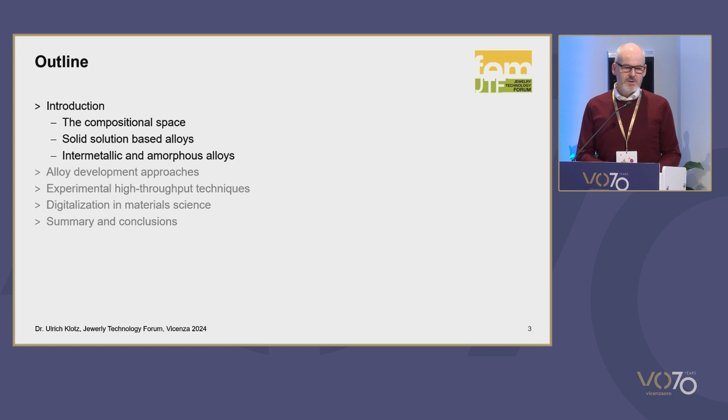I'm going to give an introduction first and then talk about the typical alloy development approaches that are around. Why is alloy development necessary? I will show you some experimental techniques and some simulation-based techniques that can be used for alloy development. And finally, I will go into a point about digitalization in material science, which is a current trend to treat data from different experiments.

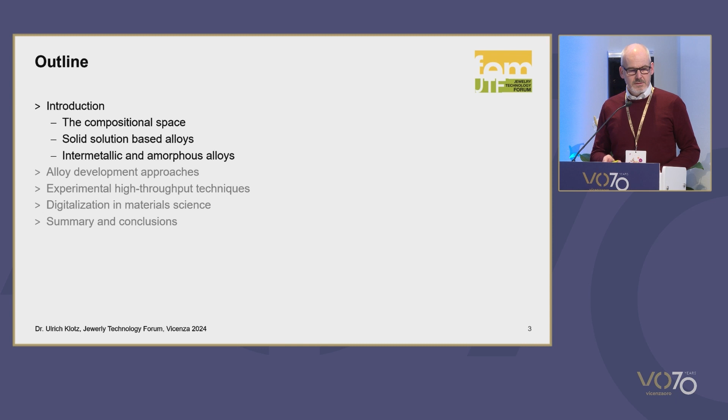So this is a huge space, and we don't know this space. So we only know the regions around one corner, let's say the gold-rich corner, the silver-rich corner, the copper-rich corner, the palladium-rich corner, but you're aware that a gold alloy is very different from a copper alloy and from a palladium alloy. So actually we know very little about the space in between. And so it's actually a no man's land that needs to be explored.

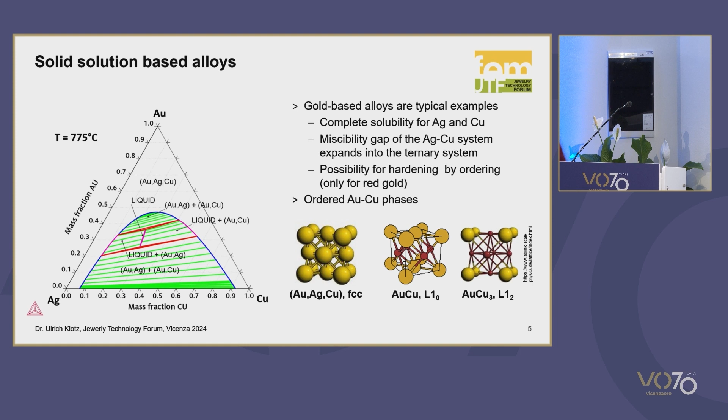So let's first start with what we know. We know alloys like these, gold, silver, and copper. We have 75% gold or 58.5% gold for 18 and 14 karat. And we know how the atoms arrange. So we have solid solution-based alloys, and then we have so-called ordering. This means the alloying elements are taking special places, and this gives the hardness in red gold.

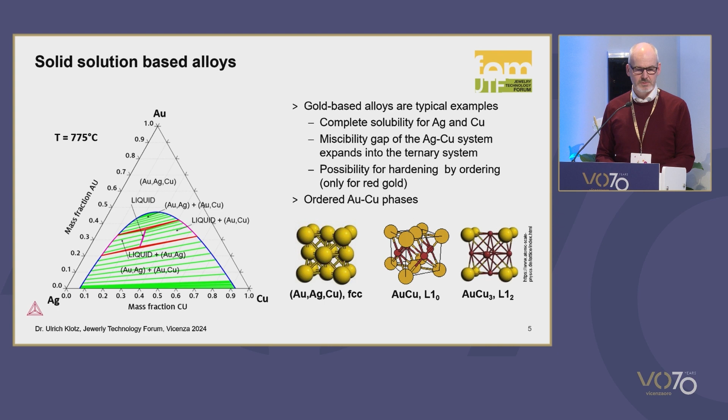Now there are other alloys, like these alloys with the pretty colors. They're based on so-called intermetallic phases. They only form at a very special composition where the atoms take a special arrangement. And we know blue gold and purple gold. And we also know these alloys for many technical applications.

Titanium aluminides are used in jet engines. Nickel aluminides are also used for high-temperature superalloys, also in jet engines or turbines. We know nitinol, shape memory alloys, that is used in the medical area and for technical purposes. So we also know some intermetallic precious metal-based alloys. And so there is a wide space that is not yet fully explored for alloys that might be used for jewelry applications.

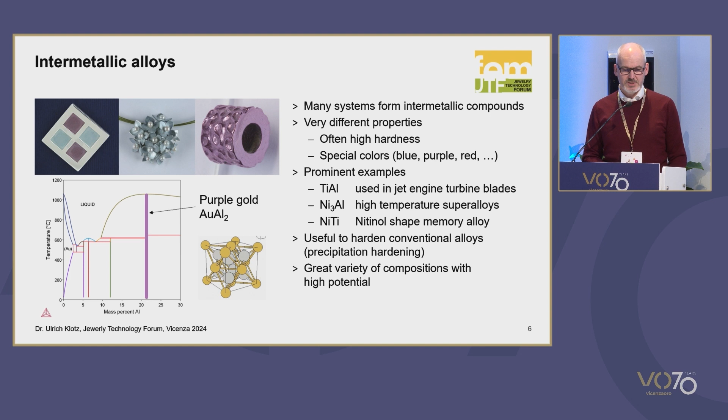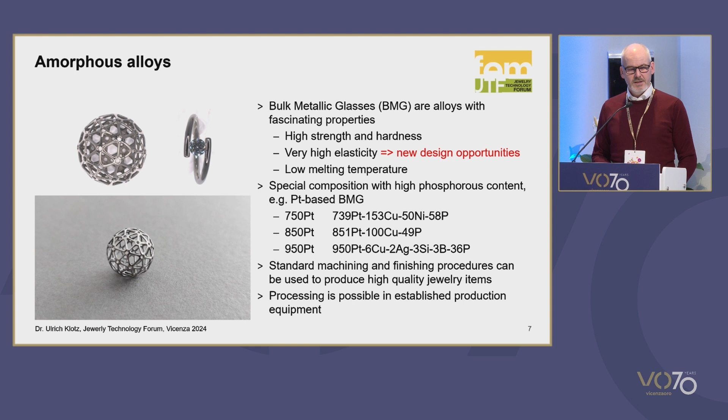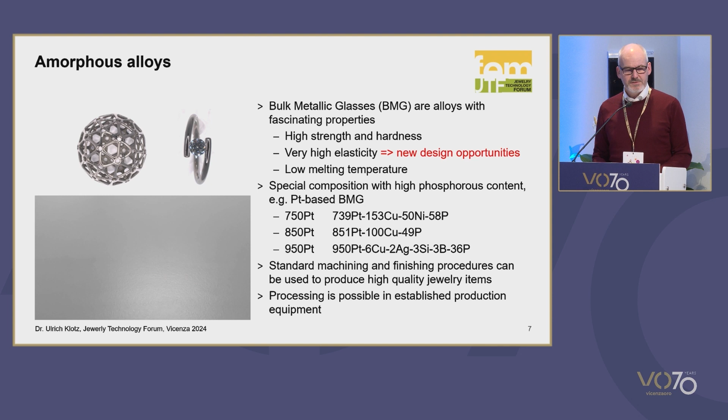Then here is a little movie, the lower image. Maybe you can play this, please. So this is something I presented last year. This is a bulk metallic glass, a platinum-based alloy, which has extremely high elasticity. So you're seeing my colleague Lisa, she's dropping this ball and it bounces back like a rubber ball. And that's because of the very high elasticity of these alloys, and that is very different from conventional alloys.

So these alloys form at very special and specific compositions, and therefore it's also important to find out these compositions. And just by melting alloy after alloy, this is very time-consuming and also money-consuming, so we need screening techniques to find such compositions.

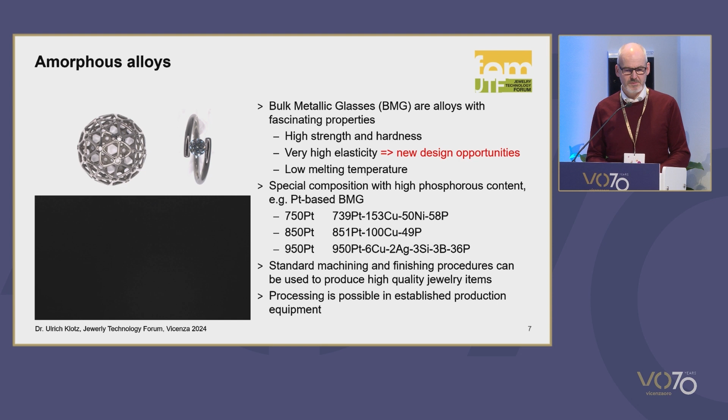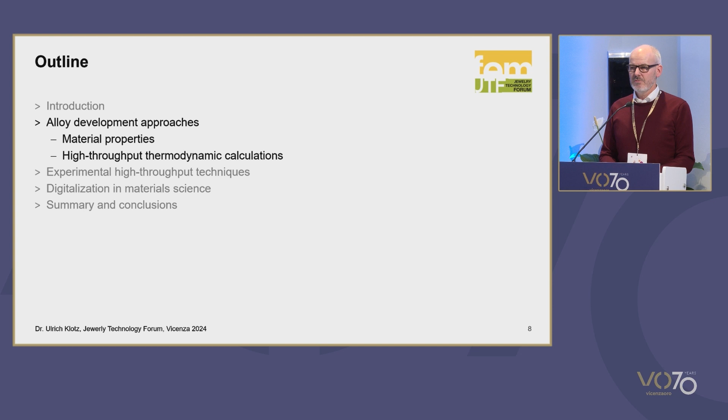Now, let's look at where simulation can help us in alloy development. So first of all, for the material properties, to determine them, simulation techniques are very helpful. And also for high throughput calculations to screen whole composition ranges, wide ranges, with many thousands of alloys. I will show some examples for this.

So first of all, why do we want to do alloy development? We want to improve the properties like hardness, scratch resistance. We know many years ago, nickel was replaced by nickel-free white gold alloys. We know about tarnish-resistant silver alloys or red gold alloys with high color stability. And in general, we want to improve the whiteness of the white gold, the hardness of the alloys. So there are many features that we want to improve with the alloys.

And we also have new manufacturing techniques like additive manufacturing. So the alloys that we know might probably not fit perfectly to that process because they were developed for casting, they were developed for cast and wrought alloys, so not necessarily they are fitting also to additive manufacturing. And we want to have exclusive components like special colors.

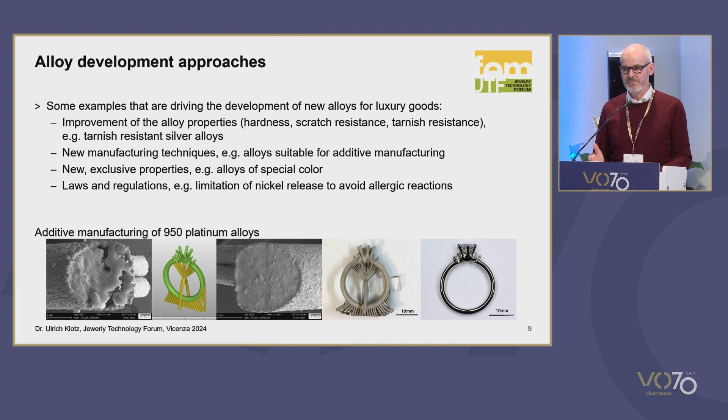And finally, there are laws or regulations that prohibit special elements, or we have elements that are mined with unfair conditions, and we want to exclude these elements from our processes. So these are all reasons why we want to do alloy development.

And if we want to develop alloys, we have to know their properties. There are many properties that the material can have. We have to know this for the production, like our processes to produce them, but also our process to make sheet, to make wire, and so on. And we also need it as input parameters for simulation.

And what parameters are around? We all know the mechanical parameters. They are quite easy to determine: tensile stress, elongation, hardness, reduction of area, and so on. Thermal properties, we are also aware: solidus, liquidus temperature, thermal expansion coefficient, and also those properties are not so complex to determine.

But for the simulation tools, we need properties we are maybe not aware of, physical properties: the volume as a function of temperature in the solid and the liquid state, the density, the thermal conductivity, the thermal diffusivity, the viscosity, and also some chemical properties like Gibbs free energies, enthalpy, heat capacity. And these properties are much more difficult to determine with standard laboratory techniques, but simulation techniques can help us to find them if we have good databases.

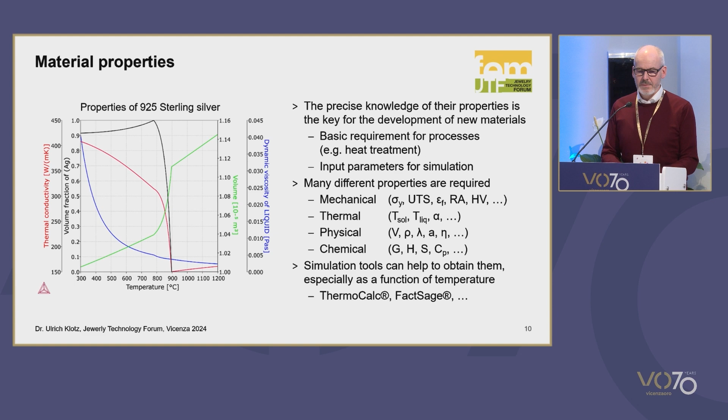The volume is reduced. This is causing the shrinkage problems that we all know during casting. And we see the thermal conductivity increases. This is an important feature for the heat distribution during a casting process, for instance. And we can use these simulation tools to feed our simulation software, like for the casting simulation, for instance, with such parameters. And this is a very important input.

Now we can also do the calculation of the solidus and the liquidus range, for instance. And this is an example I prepared for nickel-based alloys. These were alloys with up to 8 components based on nickel. And we wanted to vary the alloy compositions to find alloys with a suitable melting range, with a certain amount of phases.

And so I used the high throughput calculation technique and calculated 20,000 alloy compositions. And this plot is showing the results. So you see that the solidus, the liquidus temperature, and the melting range are varying in a quite wide range.

And with a set of filters, we narrowed down these 20,000 alloys to about 10 alloys that we found interesting for further characterization. And then we melted these 10 alloys, but we screened a much wider range, and this gives us a much better feeling how the system behaves and what is the role of the different alloying elements.

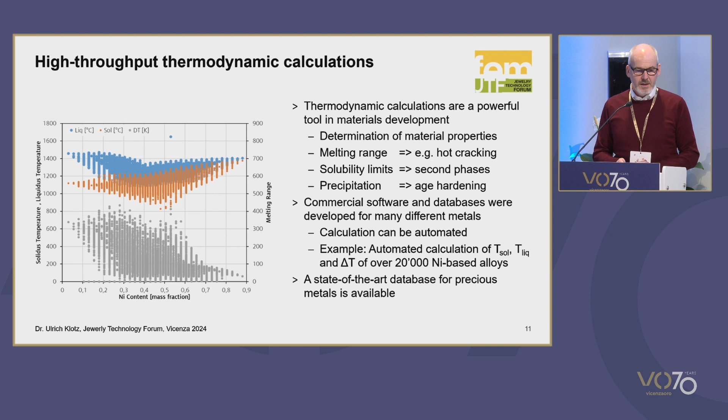Now, often simulation is not working as good as we would like to because we are lacking experimental data, because every simulation tool is usually based on experiments. So when we want to make experiments, it's good to also use screening methods, because doing one alloy after the other is a lot of time and a lot of money.

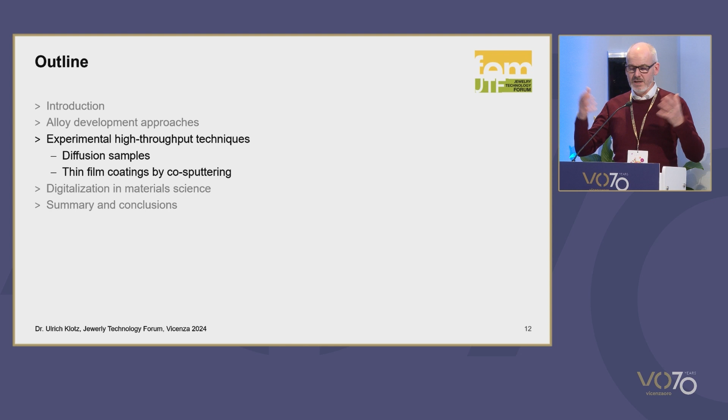But screening techniques are based on samples that show inside the sample there's a certain composition range. And within one sample, we can characterize many alloys without making 20, 50, hundreds of samples. And there are two techniques that I would like to show that are used. One is so-called diffusion couples.

So in this diffusion zone, which is maybe 1 millimeter wide, we get a mixture of all the 3 alloys in this case at the contact point, and we get hundreds of compositions within a very small range. Now we have to measure these compositions, and we can do this in the electron microscope and by microhardness measurement. And this is what we've done here.

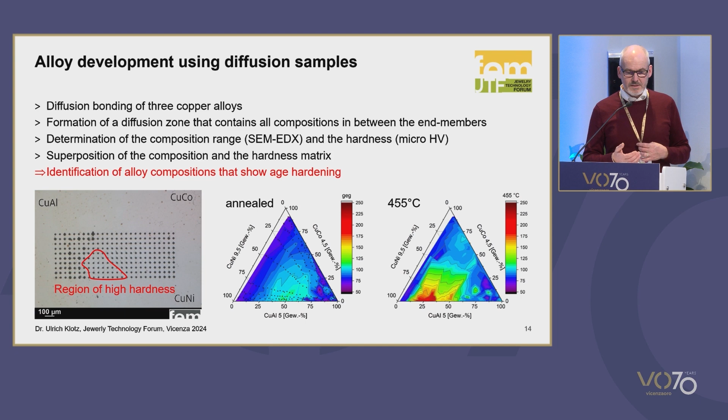And we see that there are compositions that show high hardness, while others still are staying soft. So with this method, we can screen a whole composition range and find alloys that have the potential for age-hardening. With all these samples that are shown here, we have thousands of compositions that we can screen with a few samples.

I can also match the composition with the color after a corrosion test. I can do scratch testing. I can measure the electric conductivity. So there is much more than just looking for hardness.

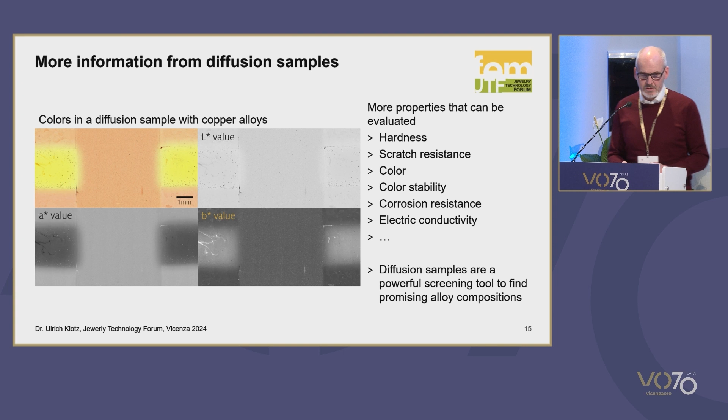With such screening methods, we have a powerful technique to experimentally screen whole alloying systems. Another technique, this is a very old example I found from Jörg Fischer-Bühner's work. There is a diagram missing here. This was obtained by sputtering technique.

So the picture here is showing a glass plate, maybe like 20 times 20 centimeter. And then we used sputtering technique to deposit alloying elements on this glass plate. And we used 3 different alloying elements: aluminium, indium, and gold. So they are arranged in a triangle, and they're sputtering material from different sides. So we get mixtures of alloying elements on this glass plate.

And now we can anneal this glass plate, and we find the blue and the purple color forming. So the lower image is in the annealed condition. And this also helps us to screen interesting composition ranges. And now we can use different mixtures of sputtering targets to determine the resulting color. But of course, we can also measure other properties like the hardness, electric conductivity, and so on, quite similar to the diffusion couple.

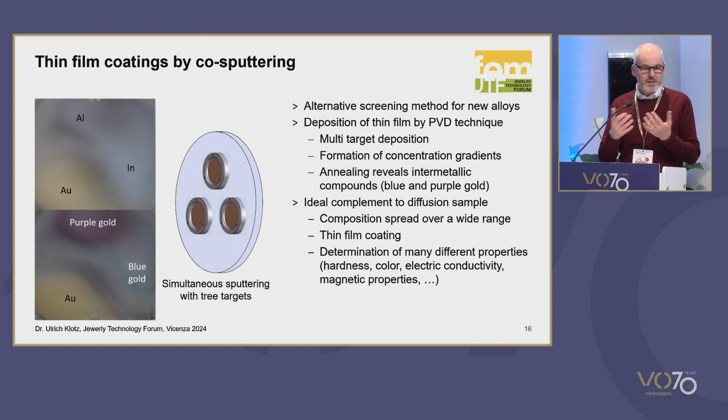But there's a difference between these two methods. With the sputtering technique, we map the area over a wide range, which makes it easy to characterize the properties. With the diffusion couple, everything is in a very narrow range, so we have to have very specific measurement techniques. So that's a benefit of the thin film coating. On the other hand, the thin films are just thin films, so they might behave different than a bulk material. And so with the diffusion samples, we are much closer to the bulk material. So ideally, we can use a combination of these two different techniques.

Okay. Now, to finalize, the digitalization in material science is a trend at the moment. And you probably have heard about a digital twin or about ontologies. And so what does this mean? We have data from many different processes, from the casting processes, from computer tomography, tensile tests, from metallographic images, hardness measurements, and so on. And also from simulation techniques.

Now, all these different results are related, but the data are generated in different systems. And they are located on different computers, maybe on different network drives, and maybe you don't know where all these data are. And after half a year, you don't know maybe how you measured them. So you not only need the data, but you also need the metadata, the information about how your data were generated. And you have to link all this information. Now you can make big Excel sheets, and after 3 months, you forgot how you arranged the Excel sheet.

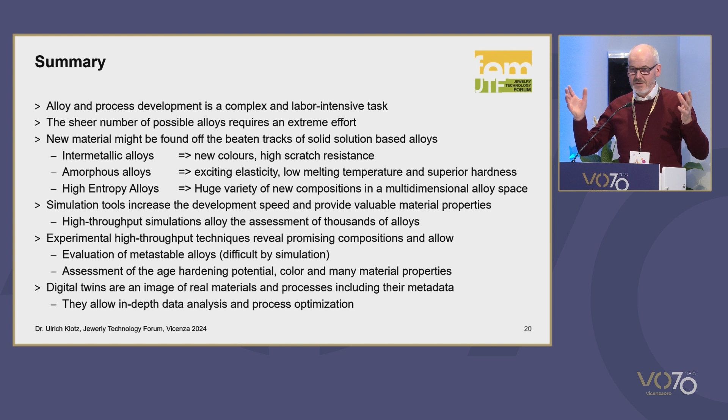So with this, I would like to summarize. I showed you that alloy development is a complex work. The sheer number of alloying elements makes it very difficult to do all the work experimentally, so we have to use screening approaches based on simulation or experiments, or ideally a combination of both. And in the future, we should look for the development of such digital twins that allow us to describe the whole environment of production and use of our alloys.